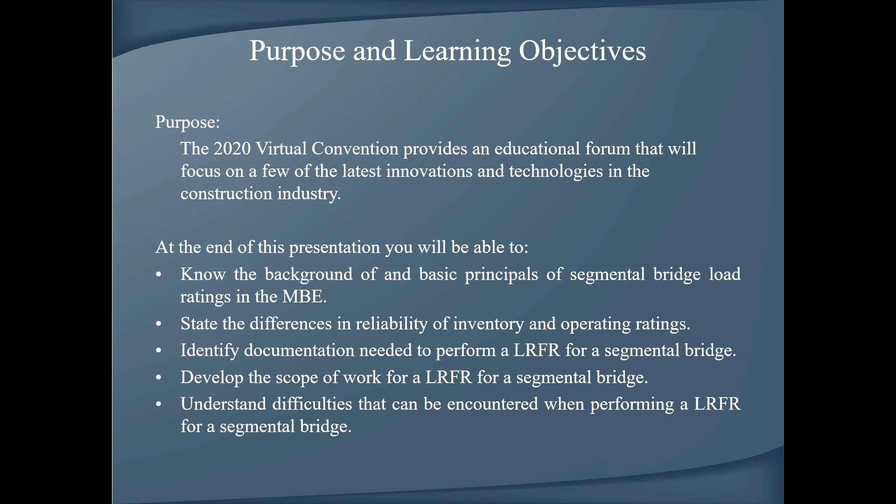Let's begin by looking into the Manual for Bridge Evaluation and consider general requirements and those specific to load rating segmental bridges. Looking at a timeline for the development of requirements for segmental bridge LRFRs, we can see that the history is fairly recent.

The first attempt at trying to load rate segmental bridges with regard to a calibrated condition consistent with LRFD was prepared for the Florida Department of Transportation by Dr. Dennis Mertz and Corven Engineering in 2002. In 2003, the first edition of the Guide Manual for Condition Evaluation and Load Resistance Factor Rating of Highway Bridges was produced.

But there were no segmental bridge special provisions. In 2005, the interims to the first edition of the guide specification added the segmental bridge requirements developed by the Florida Department of Transportation. In 2008, the first edition of the Manual for Bridge Evaluation, MBE, was produced, and we are currently in the third edition of that document.

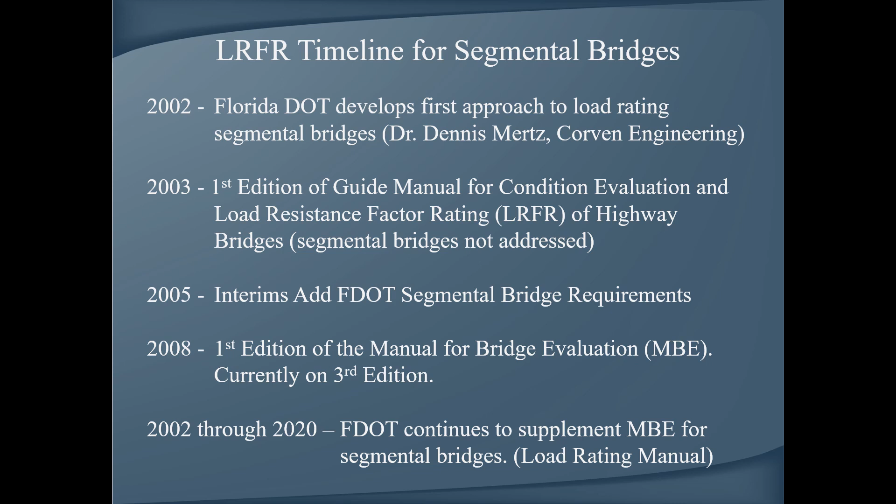Now, through those years from 2002 to 2020, the Florida Department of Transportation has continued to provide supplementary information to the segmental bridge requirements in the MBE, and I would recommend highly reviewing the current version of the FDOT Load Rating Manual dated 2020. The primary purpose of including load rating requirements inside of the Manual for Bridge Evaluation was to give an approach to load rating those bridges that were designed in accordance with the AASHTO LRFD design specifications.

The requirements for these kind of load ratings are provided in Chapter 6 of the MBE, and they are provided in two parts. Part A focuses solely on those LRFR requirements. Part B provides guidance for two other load rating methodologies, the allowable stress rating and the load factor rating, which would be applied to bridges of an older age.

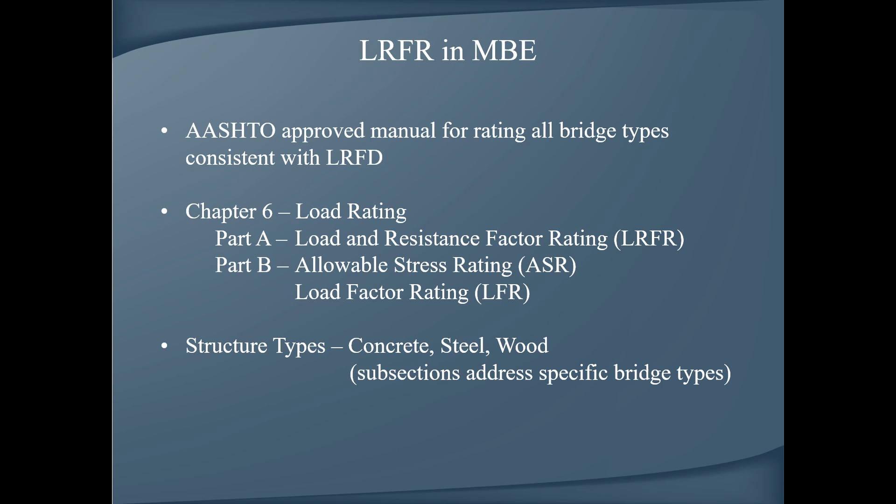Also inside of the chapter governing load rating requirements in the MBE are sections that address bridge types by their primary material type. And then also specific bridge types are discussed as well.

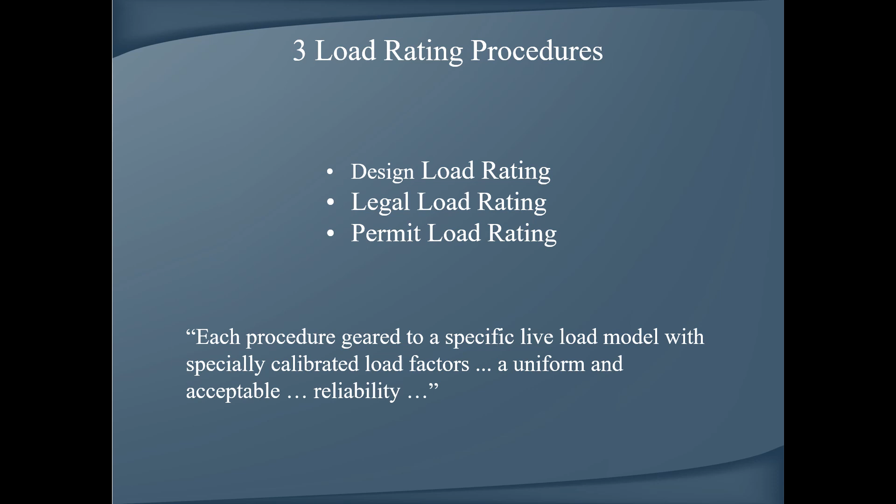Inside of MBE, we have three load rating procedures defined: design load ratings, legal load ratings, and permit load ratings. Inside of LRFR, as the MBE states, each procedure is geared to a specific live load model with specially calibrated factors and a uniform and acceptable reliability. This will be important for segmental bridges, as we'll see in this presentation.

Inside of MBE, the three load rating procedures are placed into two load rating levels. The first, the inventory rating level, is for design loads consistent with the design loads inside the AASHTO LRFD manual. An inventory rating is that level of load that can safely use a bridge for an indefinite period of time.

The second level is the operating rating, where we consider design loads, legal loads, and permit loads—all three procedures inside MBE—to look at the maximum load level to which the structure may be subjected. Not only do we have the standard vehicles mentioned in the MBE at the federal level, but every state will have their own vehicles to consider for legal loads and permit loads within these two rating levels.

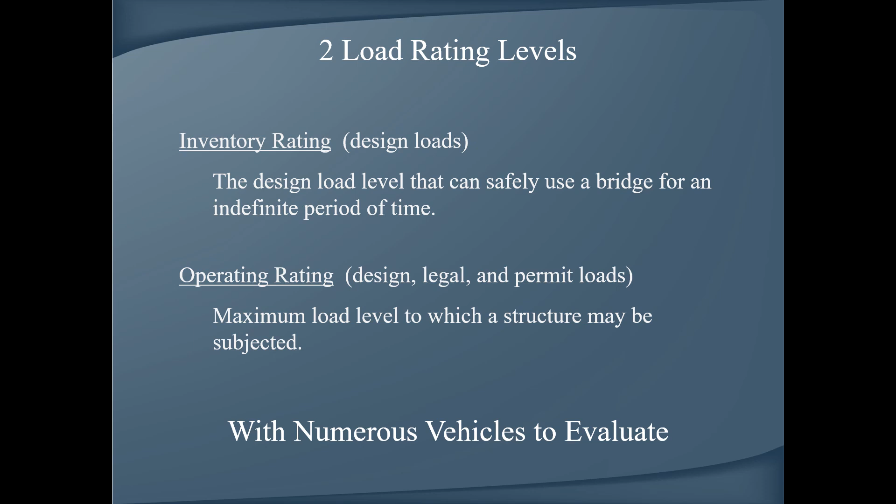Taking these three load rating procedures applied to two different rating levels, we also need to think, for segmental bridges, of five principal limit states that need to be verified: the general behaviors of the longitudinal girder and the transverse cross-section, the flexural strength of those elements, service level stresses in compression and tension, ultimate or strength shear conditions, and principal tensile stresses in service conditions.

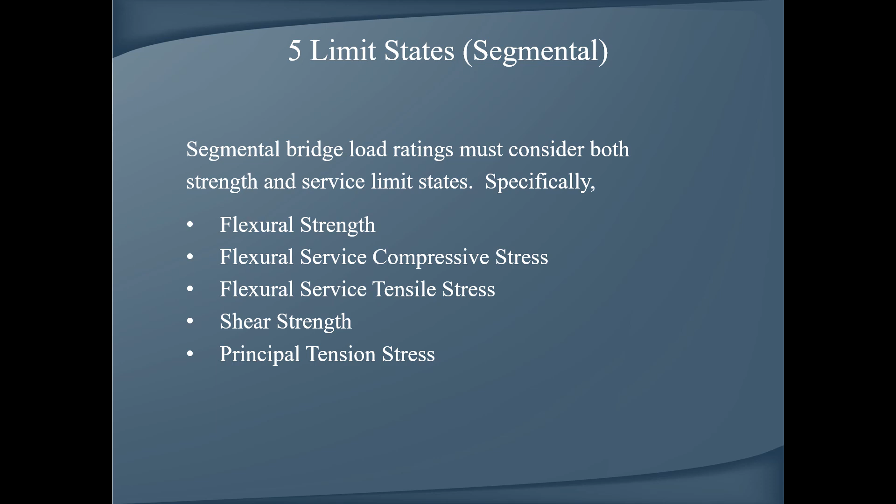The result is a lot of numbers. Again: 3 load rating procedures, 2 rating levels, 5 limit states—all typically performed at each joint between each precast segment in a bridge.

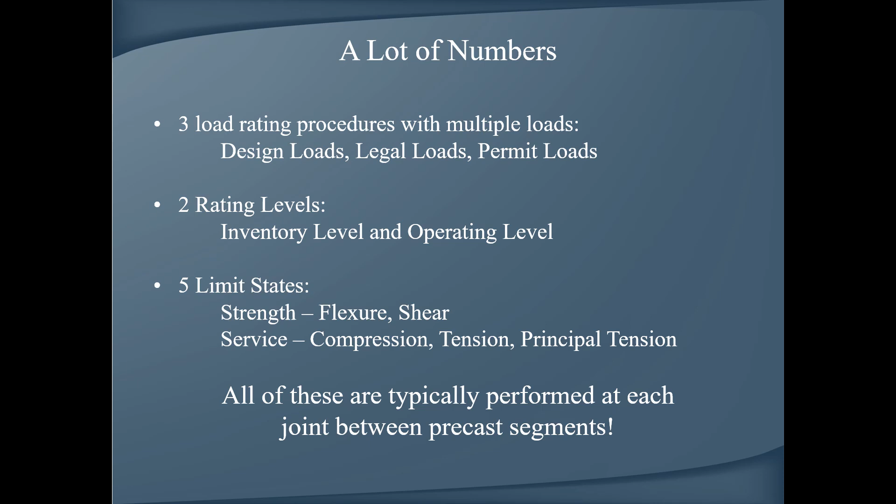Consider this project in Birmingham, Alabama, recently completed: I-20 and I-59 through the Central Business District. It's about 1 million square feet of segmental bridges, complicated by having eastbound and westbound bridges joined with longitudinal closure strips. In this particular case, there were 14 different load conditions or vehicles that needed to be load rated—design plus legal loads for the state plus their permit loads.

We looked at 5 different load effects that needed to be analyzed, and the number of segments for this job was 2,316, generating a total number of rating factors for this project in excess of 162,000. I say 'in excess' not just because of the extra 120, but because you also have to think about other factors.

Specifically, the transverse placement of loads must be considered to produce critical effects, because the bridge is made of multiple girders joined together. So we needed to think about load distribution factors and how torsion relates to longitudinal shears and longitudinal flexure—it's a lot of numbers. But fortunately, through our analytical computational methods plus good spreadsheets, the numbers are processed fairly quickly, and we can do the appropriate searches for the controlling load ratings.

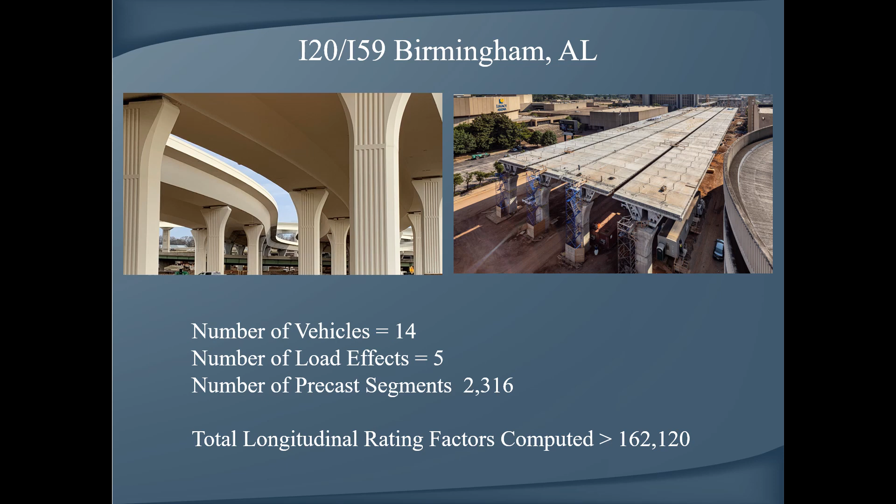As someone begins to tackle a load rating for a segmental bridge, they should understand it's going to be a complex process, for the same reasons these bridges are complex to design. The state of permanent stress inside the bridge is dependent on the construction method and the sequence of construction within that method. It's a function not only of all the built-in forces from methodology and sequence, but also the time-dependent nature of the concrete and pre-stressing steel.

There is added complexity, which we'll address toward the end of the presentation, because we are so heavily dependent in load ratings for segmental bridges on service limit states, keeping joints appropriately pre-compressed. The fact that we have an incomplete calibration at these service limit states means we have to do a lot of interpretation of the results on behalf of our owners.

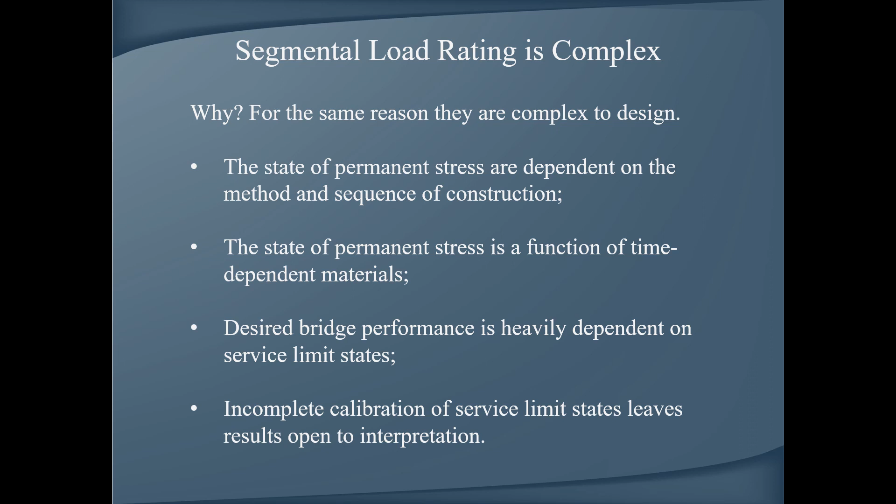Before moving on to the specifics of load rating segmental bridges by LRFR methodologies, it will be helpful to review the calibration efforts undertaken by the AASHTO community in developing the LRFD specifications, as well as the LRFR manual itself.

The calibration of the LRFD design specification was prepared on a probabilistic basis, where resistances were established with appropriate reduction factors and loads were set with appropriate load factors, such that there would be a very low probability of factored loads exceeding reduced resistances. The basic equation we're striving for at AASHTO is that those reduced resistances are always greater than the summation of all the loads acting.

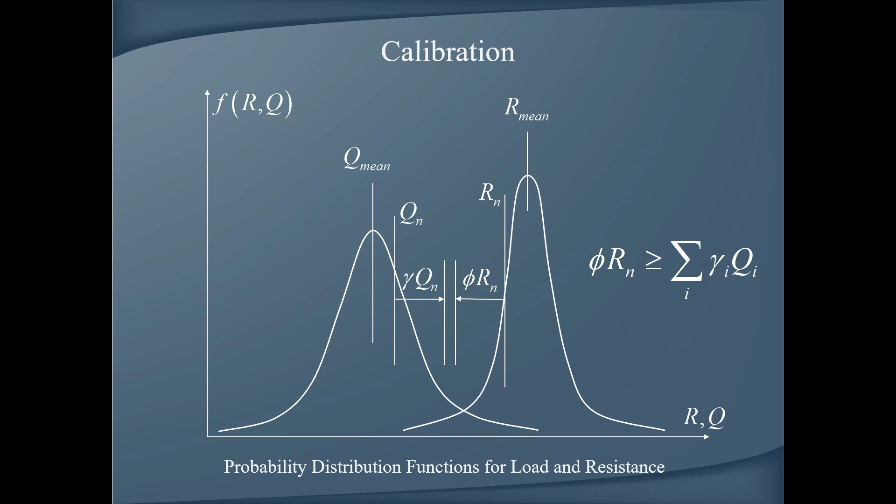When the work was done, it was considered that both loads and resistances were normalized random variables, and so we produced normalized random variable curves to represent the distribution of probability of those two features. Because they are considered normal random variables, we can use relationships to compute the standard deviation of the difference between the two probabilistic curves, resistance and load.

Normally these would be, in their normalized form, centered with the mean about the vertical axis shown on the left with a value of 0. But by introducing another variable, beta, or the reliability index, we can use multiples of the standard deviation to shift the probabilistic curve to the right, to an extent that the probability of failing the design criteria would be very small. That level of failure is expressed by the area under the probabilistic curve to the left of the vertical axis on this slide.

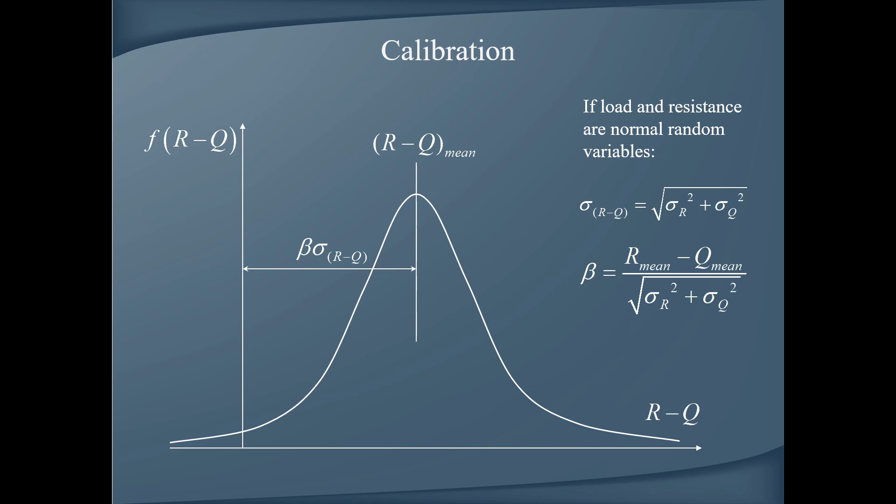So for design, the AASHTO community proposed and incorporated a reliability index, a shift from the normal vertical axis to the right of 3.5 standard deviations of the differential information. And then, proposed and introduced inside the MBE, there is a reliability index of 2.5. So in the design portion of the code, which would also be the inventory level ratings, we're looking at a lower probability of failure of the design criteria.

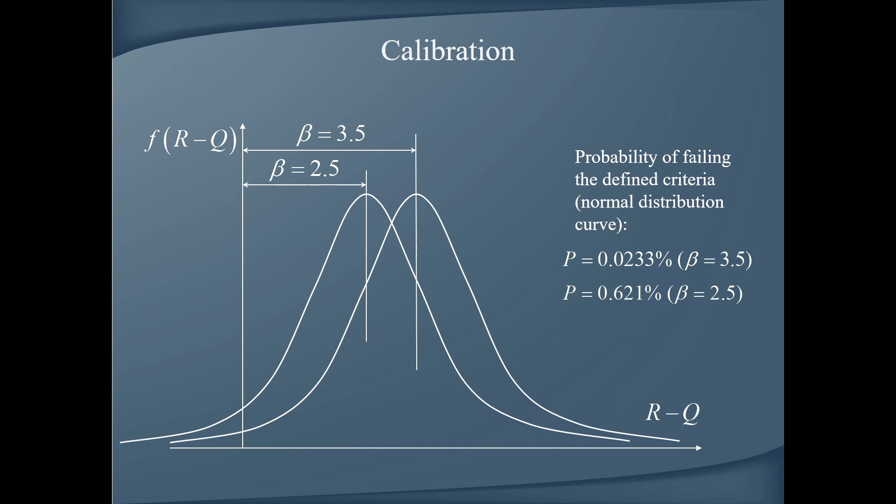Also, for the operating rating conditions, we're looking at the possibility of slightly higher percentages of failure. Under a normal bell-shaped curve, for the load effect being studied, failure using a beta of 3.5 standard deviations would only represent 0.02% of cases, whereas in the operating condition it would be 0.62%. It's important to understand these failure probabilities are known, knowing that we have factors on loads and reductions of capacity, so it does give us a very robust and reliable code.

Just final thoughts on that, and where it boils down to some information on segmental bridges: there was work by the AASHTO community to produce that set of load factors and capacity reduction factors, to establish two levels, one for design and one for load rating. This work, however, was done only at strength limit states, to produce reliabilities consistent between the old AASHTO standard specifications and the new, now somewhat old, AASHTO LRFD specifications.

There was no calibration prepared, developed, analyzed, or produced for service conditions or fatigue and fracture limit states. These load factors were solely chosen, as we moved into LRFD, so that member proportions produced under the new code would be comparable to those found in the standard specifications. A good example of this is the 0.8 factor used for the service 3 condition when checking tensile stresses in pre-stressed beams. That value is there just to make sure that in the service conditions those beams were no larger, or had no greater pre-stressing requirement, than that produced in the standard specification.

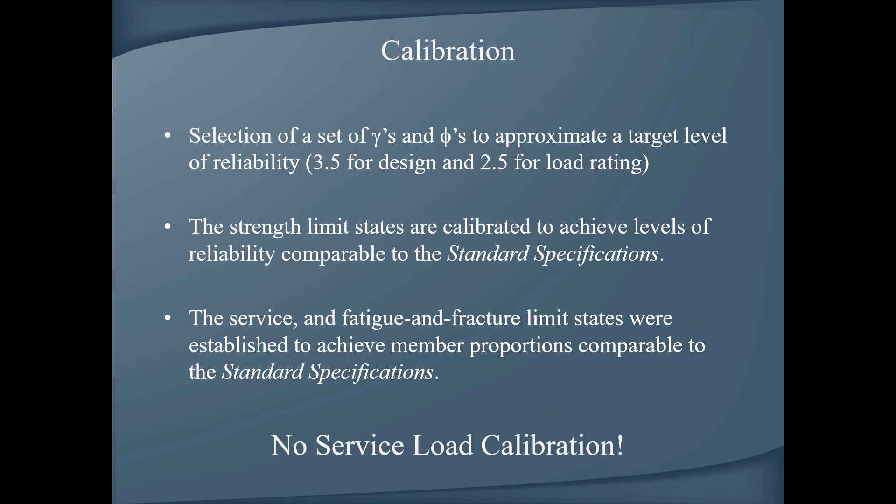So it leaves us with the fact that the LRFR, for the work we're trying to do for our clients, has no service load calibration, and this has great impact on how we prepare an LRFR. Let's go back now and consider those things necessary to produce a load rating for a segmental bridge under the LRFR methodology. The first of those is data collection.

This would be the case for any older bridge you're going to be looking at. But we do know there is a lot of information produced during the design for segmental bridges: obviously the design plans, and hopefully a well put together set of as-builts, construction documents, whether proposed contractor modifications, all the segment shop drawings, post-tensioning system shop drawings, and if kept well in their records, the casting and erection manuals - all information that can be used to populate the analysis and rating of the bridges. We need to look at well-kept maintenance inspection reports, and anything that has been done to repair or rehabilitate the bridge since it was opened to traffic.

And then finally, field surveys and measurement. If it's of such a condition that takes someone to go out and look at it, then by all means that should be a part of the data collection process.

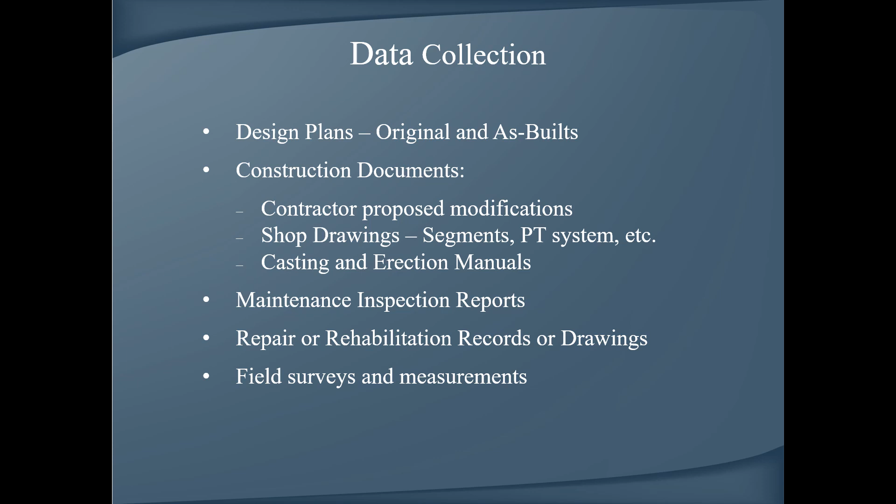Looking at some of the specific information we hope to find when getting ready to prepare an LRFR for a segmental bridge, things like the casting and erection dates of the precast segments. This might only be found in some cases after scouring through field logs.

Concrete strengths can become important if we are trying to project forward additional capacity given the age of the bridge today. The mechanics of the erection process - when spans were closed, when temporary supports were moved, how fixity at piers and towers was placed and when released, how erection loads were moved via gantries, counterweights, and how large those loads were and where they were positioned in the spans.

Information regarding the post-tensioning stressing dates would be of great benefit to building the time-dependent construction analysis, which we'll follow up on in the next session. And then, the types of ducts used in the project so that the mechanical information of the PT system can be found. Finally, the current condition of the structural components.

This may require a site visit to see if the evaluation given is as stated in the most recent bridge inspection reports.

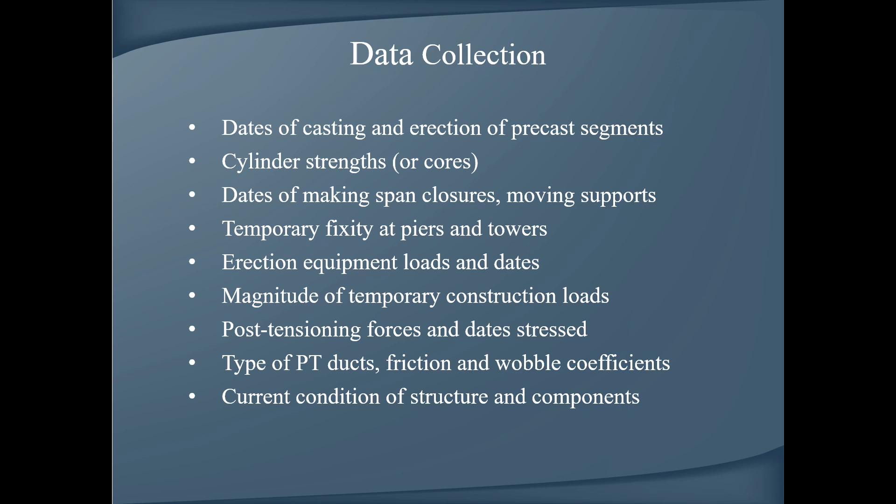Let's move and take a look at material properties needed to get moving in the LRFR. There are really three that we're looking at. We're looking at the concrete strength and density, wanting to be able to incorporate actual as-cast concrete features if necessary.

If modulus of elasticity values were found during construction through lab testing, it'd be nice to use those specifically, along with the creep, shrinkage, and thermal characteristics of that concrete. If we can't find these things, we would have to rely back on code-supplied values with the understanding of how they might impact the load rating.

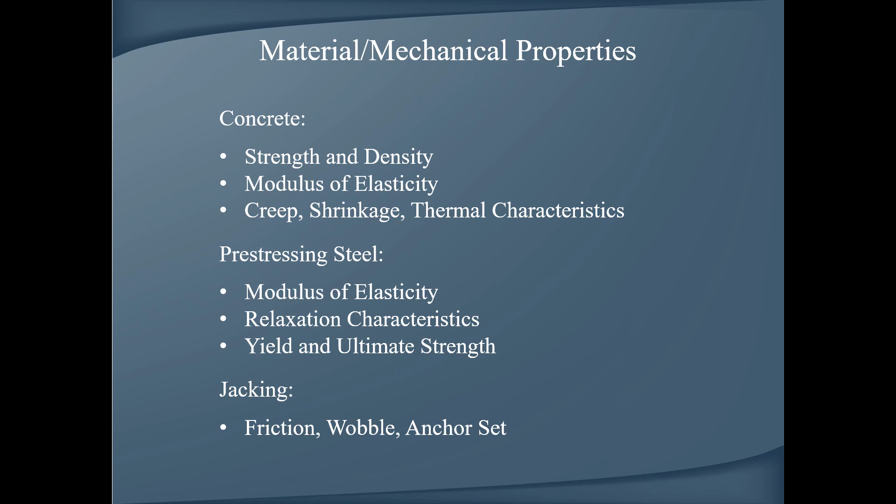For the pre-stressing steel, modulus of elasticity is typically found through the testing required in the specifications, along with relaxation characteristics and capacities, both at yield and ultimate strength, and the features of the jacking process - the mechanical properties of friction, wobble, and anchor set.

Having gathered all the data we need to support the load rating process and established the material characteristics that will be used for the load ratings, we can move on to the types of analyses that need to be performed.

The first will be in the longitudinal direction of the girder, dealing with the global flexure and shear of the box girder. To do that, we'll use either a 2- or 3-dimensional structural analysis software, depending on the horizontal curvature of the bridge.

There are many good products out there that allow us to prepare time-dependent, step-by-step construction analyses so we can capture all the locked-in erection loads and erection sequences found during our data collection phase. We can then run the bridge analyses out to the current day in the life of the bridge to establish the creep and shrinkage effects that have taken place so far.

That software will also allow us to account for all the post-tensioning effects - the primary flexural effects, secondary bending moments due to continuity, and losses due to instantaneous friction, wobble, elastic shortening, and anchor set, as well as long-term effects of the pre-stressing steel with regard to relaxation, and the shortening of the bridge because of creep and shrinkage of the concrete.

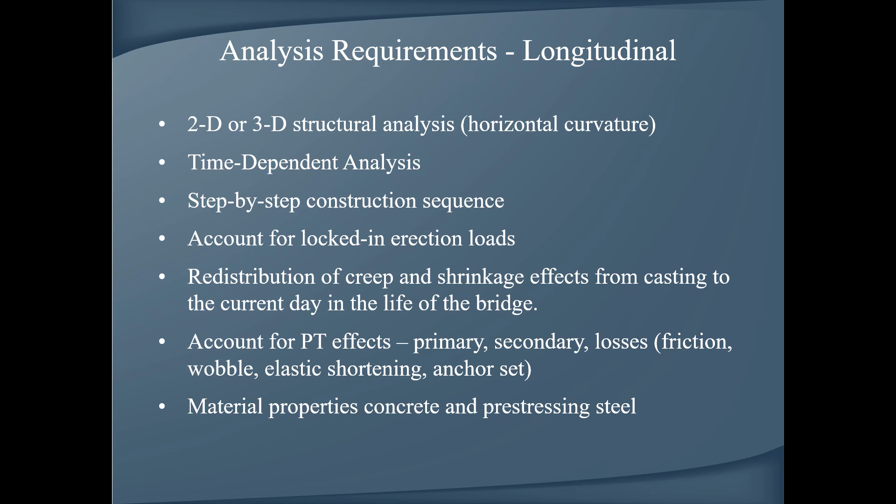As an example of the look and depth of analysis, this is a fairly short segmental bridge in Tennessee, bridge number 2 on the Foothills Parkway - a highly curved structure with a minimum radius of about 262 feet and super elevations that varied back and forth considerably. Span lengths are about 180 feet, and the girder depth is about 10 feet.

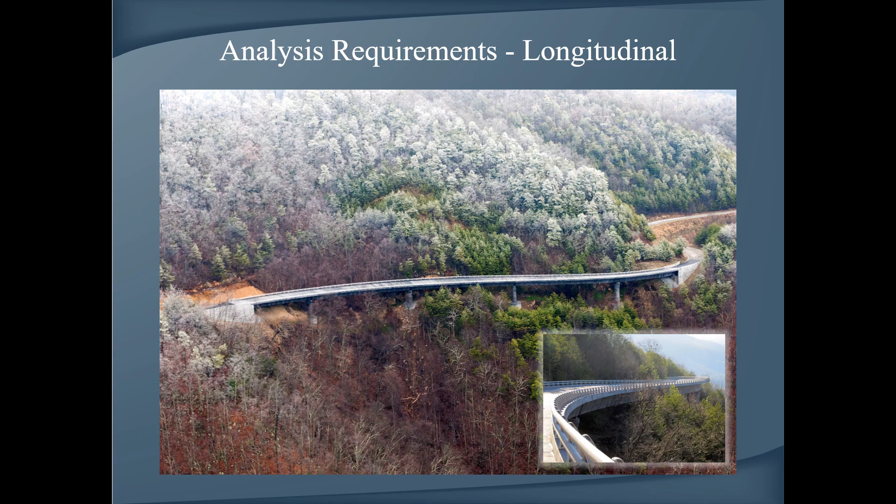For this analysis, we prepared 3-dimensional time-dependent construction analyses where we exactly replicated the contractor's method of construction and all the post-tensioning details, leading to a very effective accumulation of all the permanent conditions, or the permanent state of stress, within the bridge.

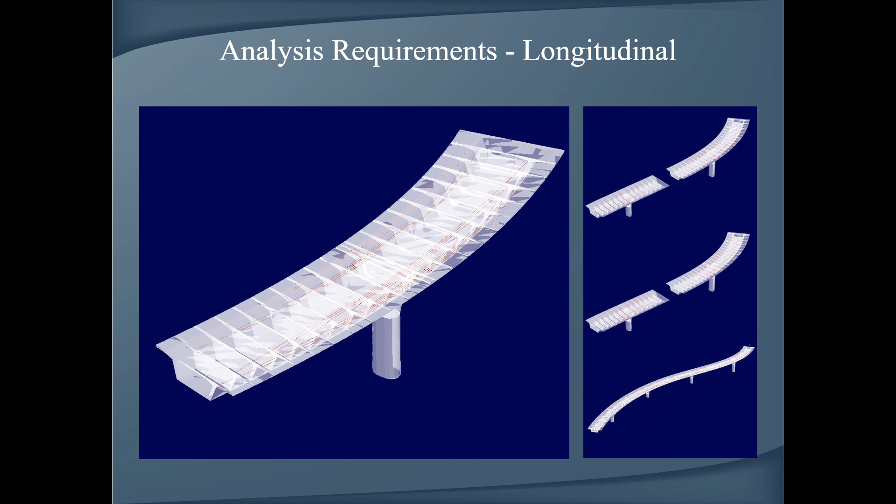The second analytical requirement is in the transverse direction of the box girder. Traditionally, we have used a combination of influence surfaces or simple fixed-end finite element analyses to produce localized moments for concentrated loads, then distributed those loads on a 2-dimensional frame and superimposed to sum all the moments. If there is something more complicated like a combined girder cross-section, other simplified methods such as Fauchart's method can determine the distribution of load between multiple girders and the generalized effect of bending within a span.

There might be a case when something more significant needs to be done, either to avoid posting a bridge, or because the cross-section is so complex that traditional methods don't apply. In that case, there is a need to move to more complete finite element modeling.

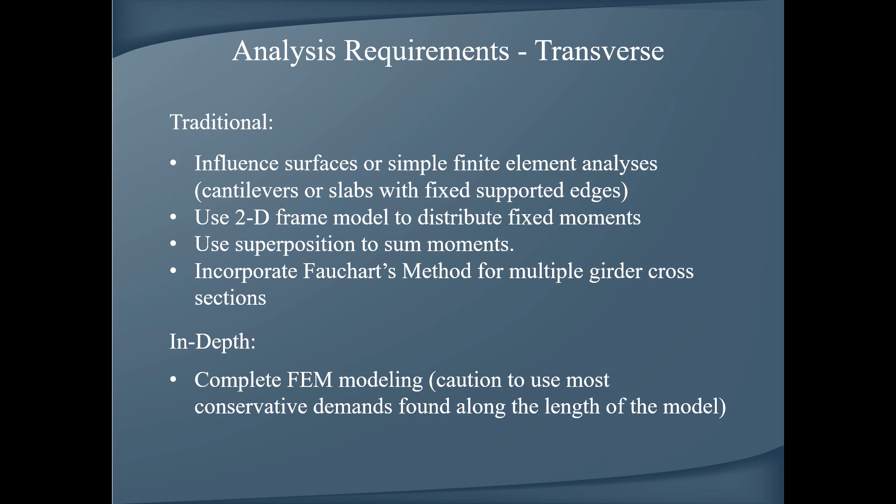There is some caution to be taken here, that we don't get too caught up in finding absolute minimums and maximums, because typically there are certain controlling features. For example, you have a cantilever live load moment at midspan that might be distributed longitudinally along the length of the girder as per the deflection of the span, but back at the pier where there's no deflection, that load is still very concentrated. So we want to use the most dominant governing number.

This shows the more traditional approach. We have uniform loads like the self-weight, wearing surface, and barrier rails that can be applied to our computerized model. We transform from the typical model to idealized members to the computer model.

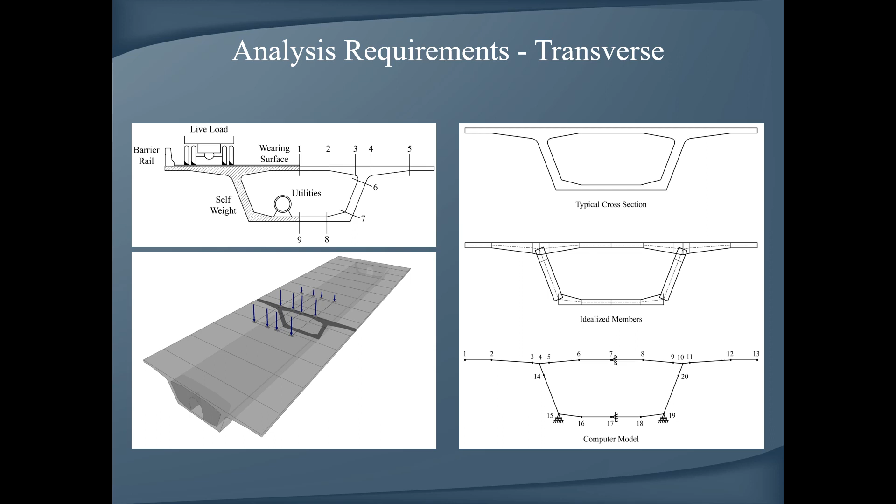Those things that happen per foot we can apply directly to the model. In the bottom left-hand corner you see the application of two HS-20 trucks positioned to produce negative maximum, or positive bending between the webs. We would perform that on an influence surface or finite element program, then distribute those around the simple frame and sum the moments to finish the analysis.

With analytical computational efforts behind us, we can then move on to the rating equation itself to find rating factors. And we find from the MBE equation

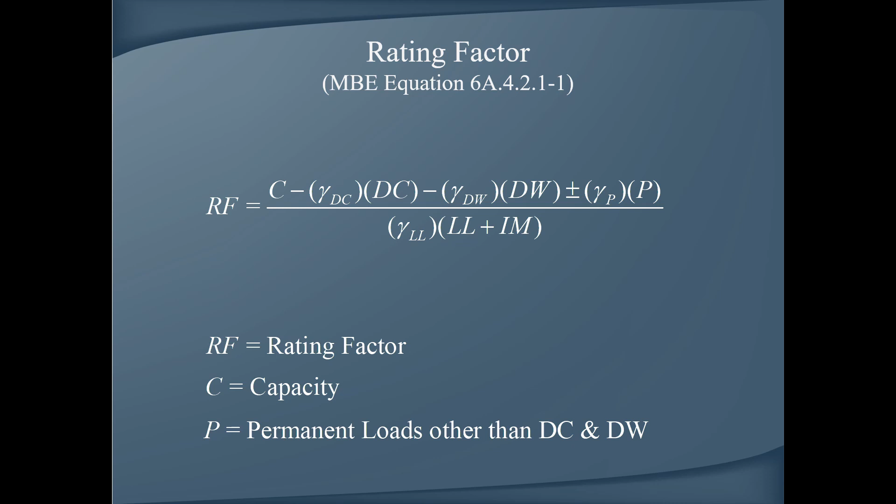At the pier of a segmental bridge, the secondary moments are reducing overall negative moments, so that would actually be adding to capacity through a positive sign here. So we want to make sure that we track all the right sign conventions of all the different loads that we are including in the rating factor computation.

When we think about the capacity of the bridge, we want to recognize that MBE has produced factors - and I guess it's in LRFD as well - condition factors based on the condition of the bridge, and those parameters of what that factor would be are given inside of the MBE.

A system factor is something that is very understandable within highly redundant structures, but there are special conditions inside segmental bridges that need to be thought about. And then you have the LRFD resistance factors that are normally placed on the type of member being verified.

Those system factors we talked about need appropriate consideration given the robustness of segmental bridges in their typical condition of longitudinal continuity. A big one here: the continuum of the box girder, the fact of the torsionally stiff section and its extremely robust nature with regard to carrying load and distributing through multiple tendon load paths given throughout the section. The number of webs gives us another feature with regard to load paths, and then the post-tensioning details themselves can play into the system factor.

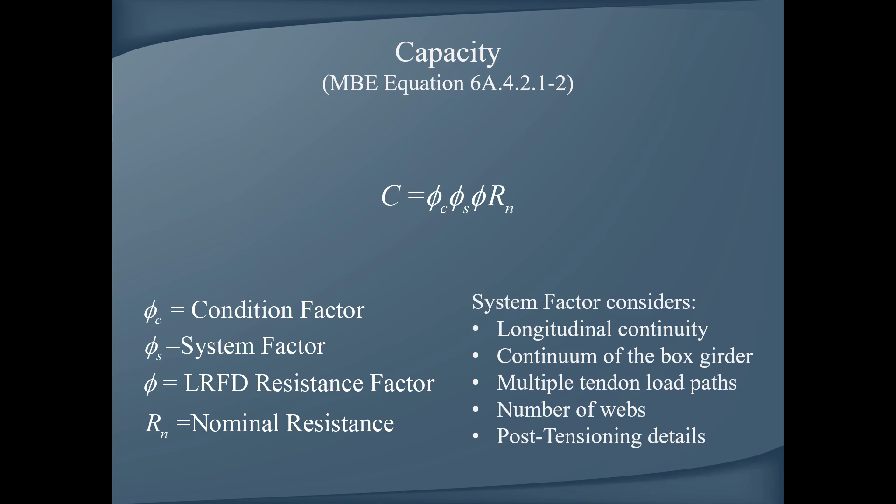I've included here the table for system factors found inside the MBE, just to show how these things can vary given the type of structure, the type of span and how it is or is not continuous, and the type of post-tensioning as typically applied by the method of construction.

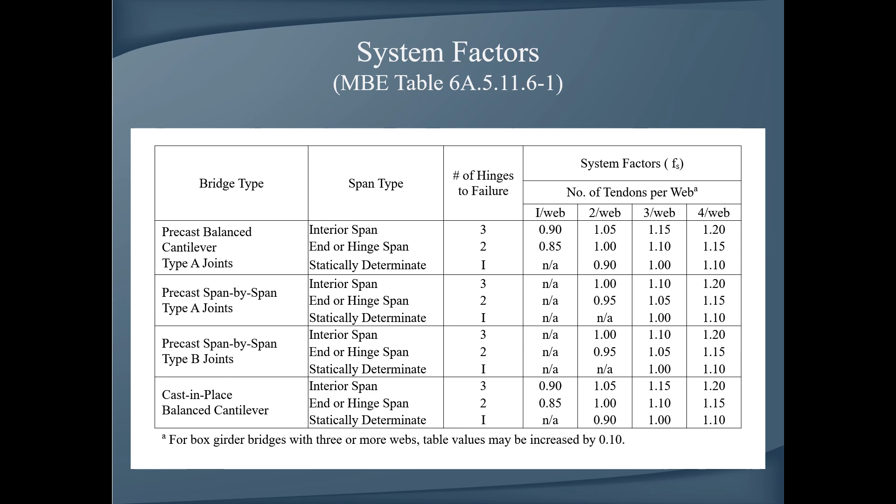The exercise was normalized for an interior span of a 2-web box with span-by-span or typically external post-tensioning. Other factors were taken from there, and this was originally prepared in a sensitivity analysis by Dr. Dennis Mertz.

An interesting expansion of the load rating equation found in the MBE is the segmental equation given by the Florida Department of Transportation in their load rating manual. It calls our attention to the need to include all the loads appropriate for service limit state verifications and load ratings.

Often there might be a bridge type that is only being load rated at strength limit states, where some of these loads have been dissipated through hinging or redistribution mechanisms. But we need to be sure and apply all of the appropriate load factors at service limit state load demands.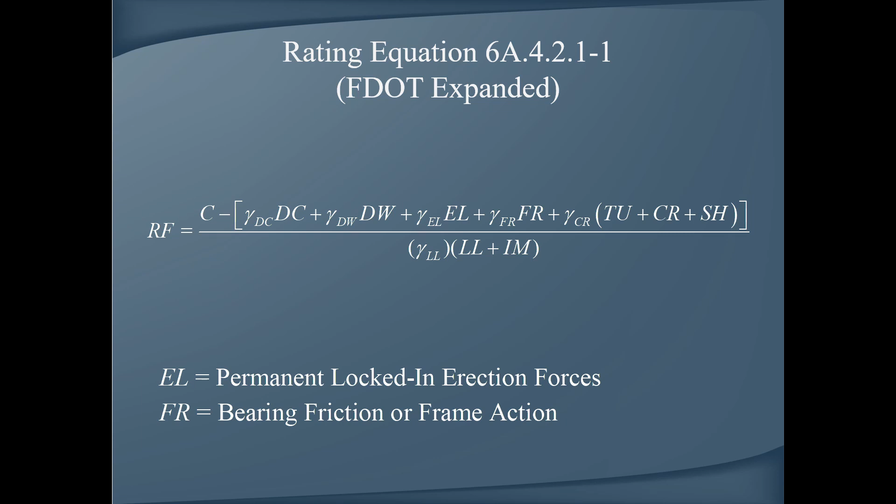Having considered the expanded form of the load rating equation, we can then begin to gather the factors, the capacity factors and the load factors, in order to modify the results from our analyses to produce the rating factors.

The first level of rating, the inventory rating, I won't look at in too much detail here because it's pretty much as per the AASHTO LRFD code. Key at the inventory level, whether we do strength or service loads, the second and third bullet under live loads, we are using the number of design lanes. And also we should be including thermal gradient in the inventory ratings at service limit states only, and not at the strength limit states.

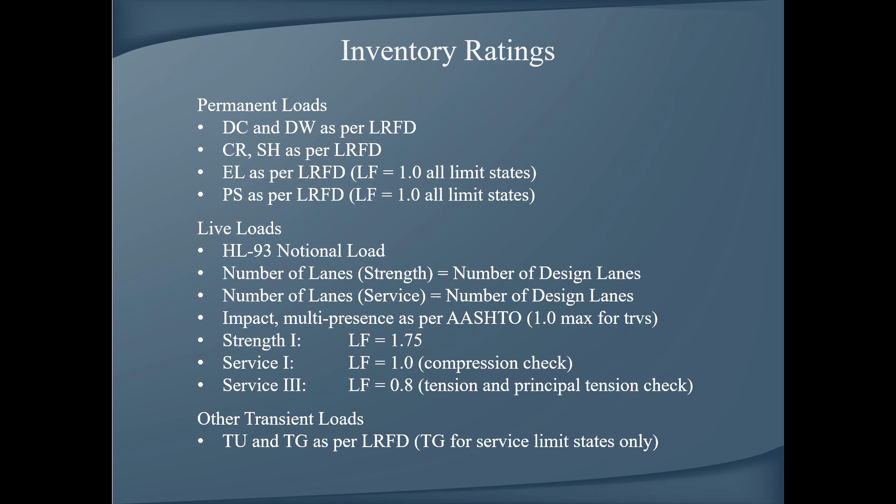Presented on this slide are those similar features for operating ratings of a segmental bridge. Permanent loads, again, as with inventory ratings, pretty much consistent with AASHTO LRFD. When we get to live loads, we do notice the difference in the second and third bullets, that at strength limit states we're looking at the number of design lanes, but at the service limit states we're looking at the number of striped lanes. This is being done because the calibration that was produced to make the LRFR was done at strength limit states, so we know that and have confidence in those load factors.

But there was a fix prepared by Dr. Mertz and Corven Engineering that introduced this concept of striped lanes, based on the work done with the Florida Department of Transportation back in 2002. And so that allowed a level of calibration at the service limit state that wasn't appreciated before that. The other interesting load feature is that there is no thermal gradient in any condition, strength or service limit state, for an operating rating of a segmental bridge.

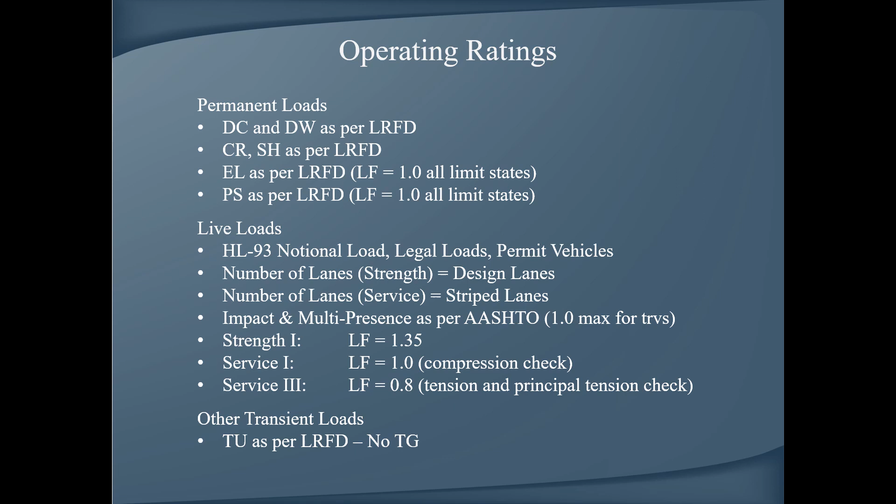So I mentioned before that there are three loading procedures, two load rating levels, and five limit states. The one that is interesting to consider is that of the principal tension stress.

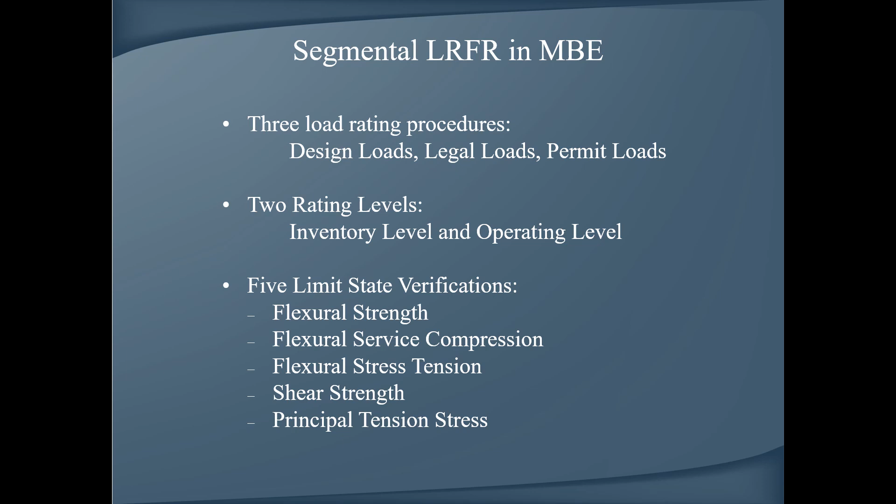To determine the principal tension rating factors, we look at Mohr's circle for a cross section. We know the features of the bridge design. In this case, there is no vertical compressive stress, so we only have to deal with the axial stress, P over A or F over A, sigma 1, and the computed shear stress at the neutral axis will allow us to find the radius of the Mohr's circle. We can also locate the circle center as just being half of the axial force, as there is no vertical compression in this particular case, no vertical post-tensioning in the webs.

That allows us to find a minimum principal stress under the permanent conditions. We then apply live load, and we have really no change in axial force, but we do have an additional shear stress that's being applied. Now, if there is a haunched bridge or variable depth bridge, there might be an additional axial force produced by the vertical loads, and that would have to be considered as well. But for this constant depth bridge, we just would be adding a change in shear force, which would enlarge the Mohr circle, creating a larger principal tension.

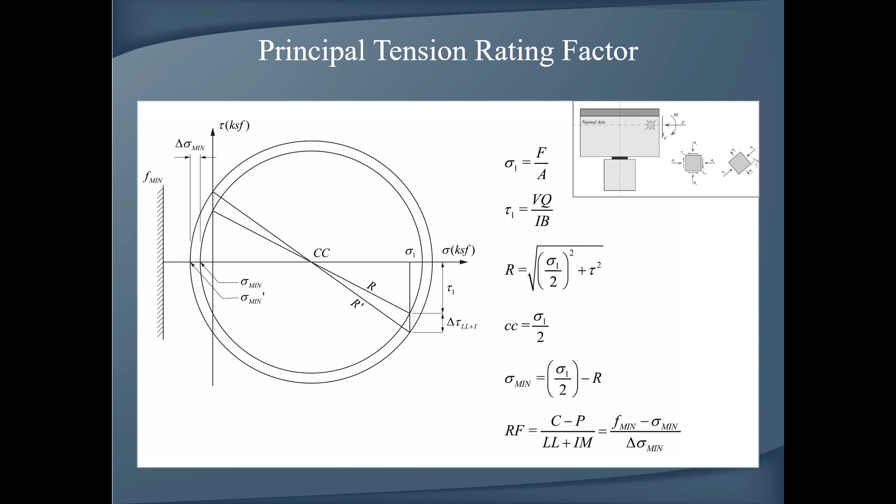We can look at the difference in those two principal tensions, sigma min and sigma min prime, and compute delta sigma min, which would be the change in the principal tension for the given live load effect. The multiples of delta sigma between the minimum stress under permanent loads and the absolute minimum given by the criteria would then give us our rating factor.

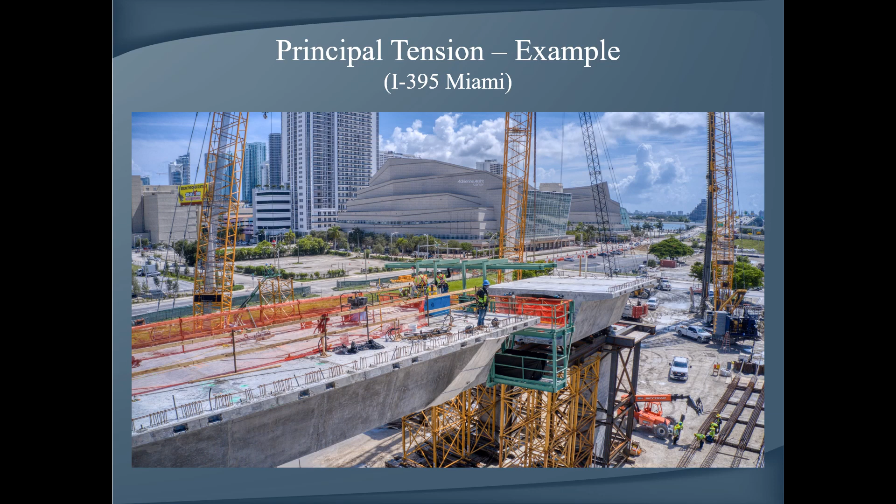We'll look at an example real quick. Under construction right down in Miami is I-395, being built by the joint venture of Archer Western and de Moya. In that bridge, we were able to produce a fairly robust principal tension because we're using some large draped external continuity tendons.

In this particular bridge, it's built in balanced cantilever with span lengths of typically 225 feet. Looking at the multiple roadway widths, this example is a 40-foot roadway, with a structure depth of 10 feet, and a total of two webs 2.5 feet thick.

We can see the stress produced as P over A being 178.9 KSF, the permanent stress - dead load minus the pre-stressing and all other load effects. Then for this particular case, rated for HS20 and the HL93 load, we found the additional shear stress produced by that load, and the two principal tensile stresses for those two conditions, with the difference being 9.2 KSF in additional tension.

So we know the limit in Florida would be 3.5 square root F prime sub C, using a concrete strength of 8,000 psi. Looking at the rating factor equation, the capacity would be that tensile limit, 3.5 times the square root. We'd subtract from that the demand, the permanent state of principal tension of 11.35, and divide by the unit value of the influences of HL93, and see a fairly large rating factor of 3.67 for this bridge, which we're very happy to have.

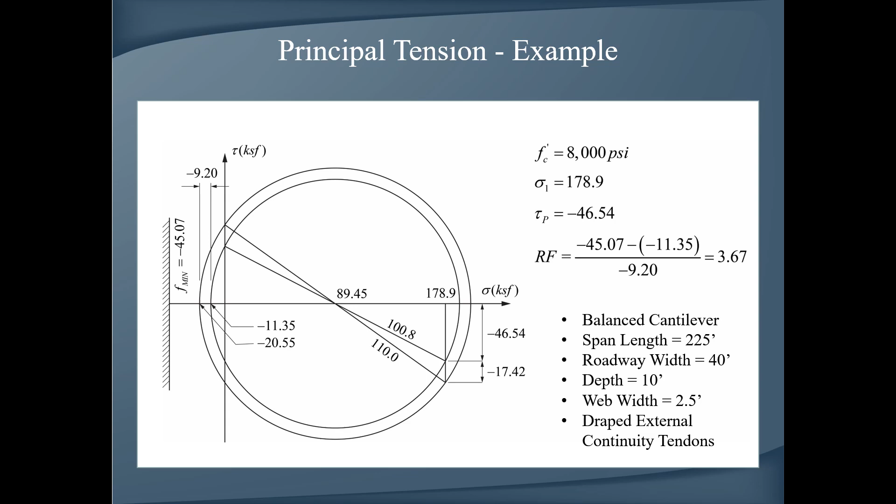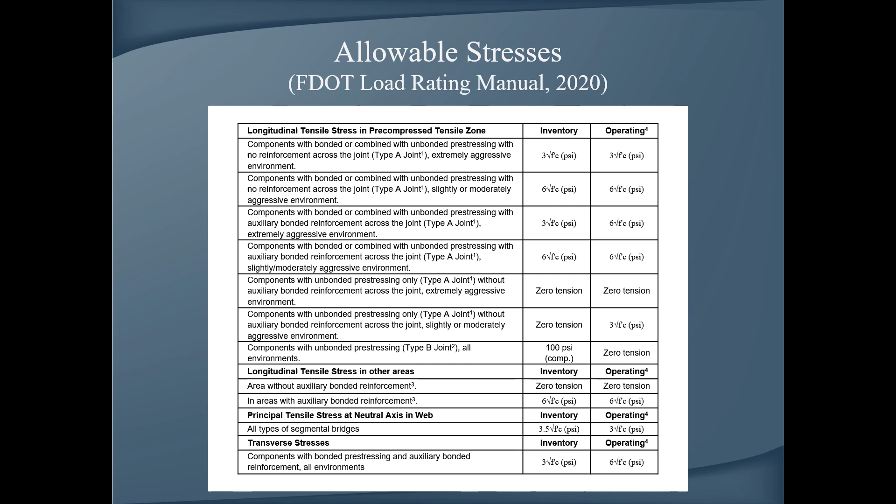So we put together all those things - the data we need to collect and gather to define the material characteristics. We perform the analyses necessary: longitudinal construction analysis, transverse features of the box girder analysis, and then apply the rating equation with the appropriate factors to produce segmental bridge load ratings. But unfortunately, there are still some difficulties encountered that need to be discussed well inside your load rating team, and also with the owner, to establish appropriate expectations.

Let's take a look at some of the difficulties you might run into when preparing an LRFR for a segmental bridge. First of all, you might be tasked with load rating an older bridge that was designed in accordance with the AASHTO standard specifications, as opposed to the now applicable AASHTO LRFD specifications.

Changes in live load models, as well as other loads like how we compute thermal gradient, can lead to a likely condition that the bridge will not rate at LRFR levels under the inventory load ratings, or design level load ratings. These inventory ratings are very important to the way DOTs operate, and this information should be explained thoroughly with your client.

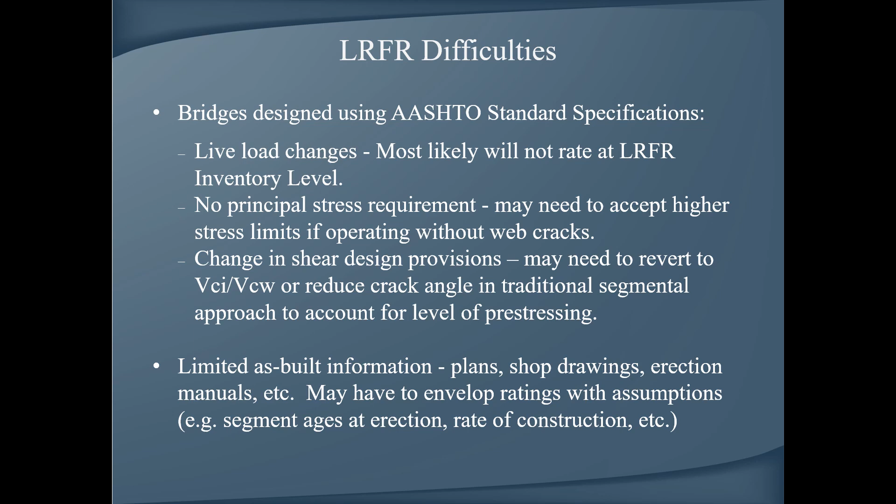One issue we've encountered recently is that standard bridge inspections don't always accurately assess the condition of a post-tensioning system. Inspections of post-tensioned segmental bridges are more complicated than normal, and many inspectors have not had the opportunity to be trained to look for specific issues that might affect the condition of a post-tensioning system. So it might be wise to visit the site and audit the condition of the bridge before preparing the load rating.

When we look at service limit stresses, whether on the direct tensile side or the principal stress side, the rating equation numerators are usually very small, as the bridges were typically designed right up to the limit of zero stress in the joints in the longitudinal direction, or right to the limit of a fairly small stress—3.5 square root for principal tension. The result is that small changes in capacities or in the demand side can greatly fluctuate the changes in the load rating results. So it may be important to perform somewhat of a sensitivity analysis on those features before recommending an appropriate factor to your client.

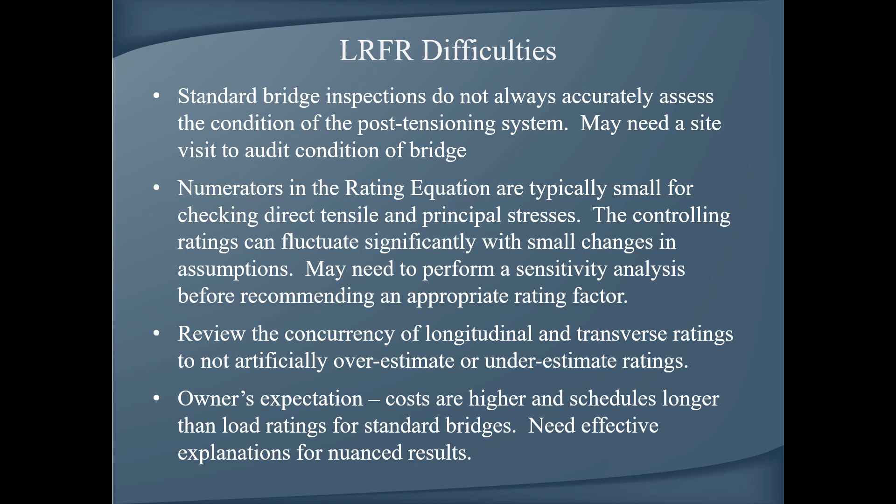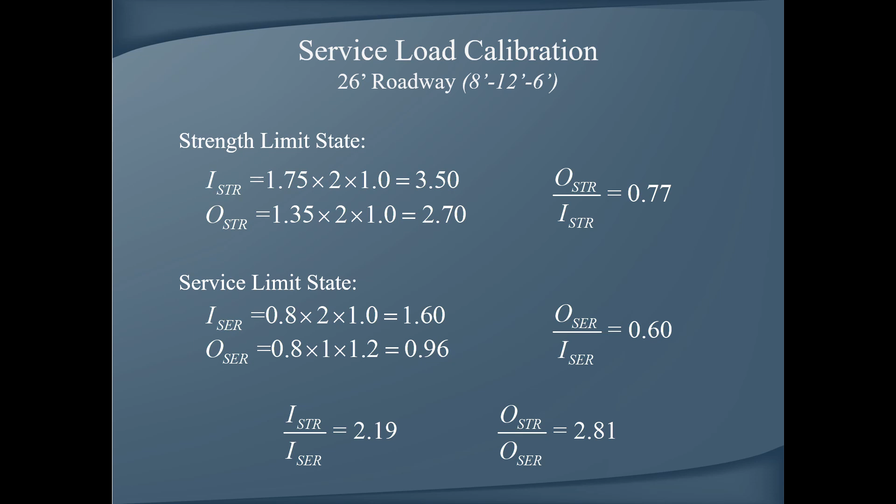So when you move into widths different from the condition of 3 design lanes and 2 stripe lanes, there needs to be some cognizance of adjusting the live load results at operating levels, so you don't overestimate or underestimate the load rating results. This can put you in a real pickle, and it just needs a lot of interpretation on your part.

Fortunately, though not immediately available to us, through the direction of Jeff Pouliot at the Florida Department of Transportation, who helps run our maintenance subcommittee regarding segmental bridges inside of ASBI, we've been able to move forward with NCHRP on a new study that will be commissioned soon. We're moving towards having the service limit states calibrated, along with good examples to pass that information along, so there will be relief in the future for modification of the striped lane theory from these results.

But in the meantime, it still takes a little bit of nuanced touch to get the right separation and the right level of load at operating levels. It's a lot of information, so just a couple last thoughts.

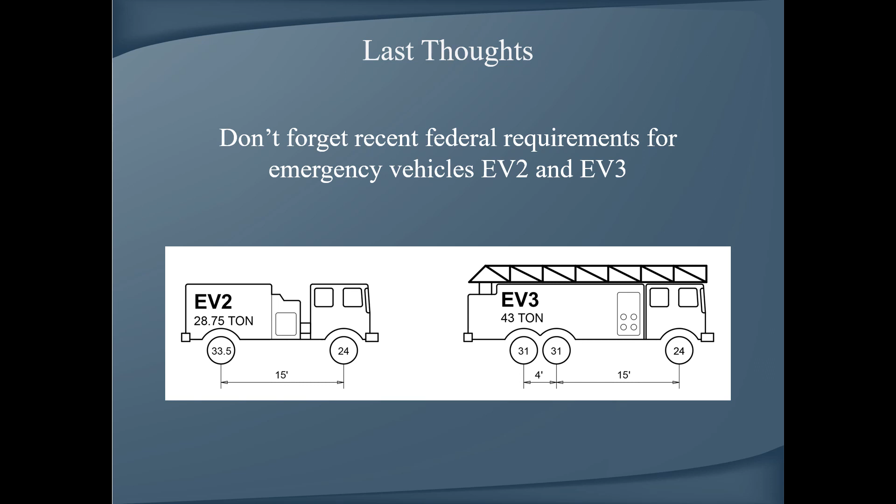Don't forget that fairly recently we have 2 new federally provided requirements for emergency vehicles, the EV2 and EV3 vehicles. You may have been asked to go back and include these in load ratings you've already prepared for owners. Also, though maybe not really a load rating, someone might ask you to evaluate a transit structure at an LRFR level, which segmental bridges and transit structures go well together.

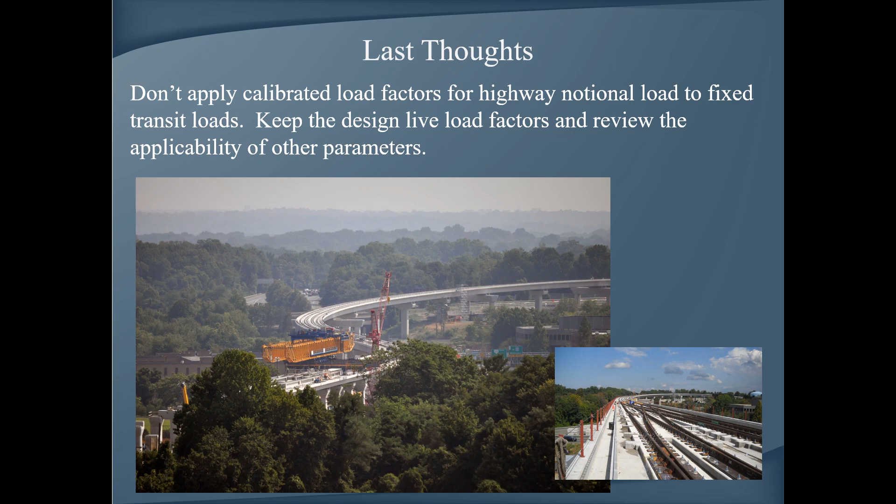Don't get caught applying the calibrated effects between the standard specifications or whatever design code the system was designed for, its load factors. Don't get caught in the calibration changes. These are fixed transit loads, not a notional load adjusted inside the framework of the design. So though you may advance other factors of the LRFR in evaluating the bridge, the live load factor should definitely remain as the original design.

Thanks for listening today, and hopefully this will advance your capability in preparing load ratings for segmental bridges under the Manual for Bridge Evaluation load rating requirements.